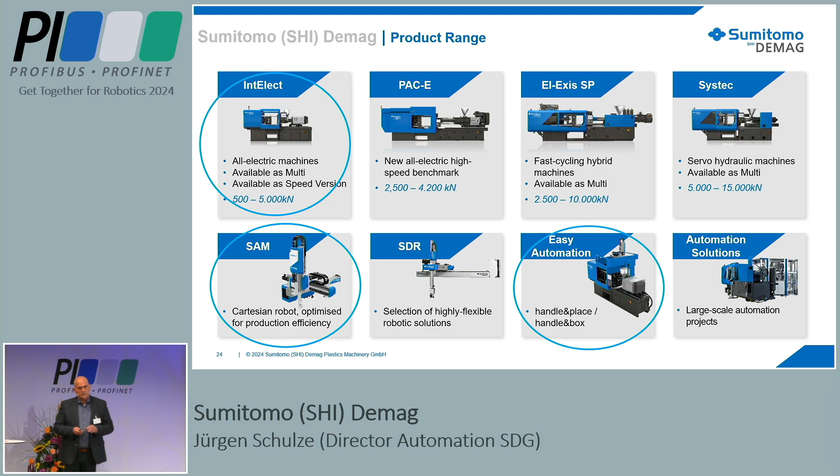And for automation, we have developed in the last years our own series. We called it the SAM series, Sumitomo Automation Machine. And we have additional elements for this automation, for example, a brand-labeled product from a French supplier. But our focus is mainly the handling system, very close to our process machine. And we are focused on more smart and easy automation.

And we think we have, from our strategy side, more than 30 years of experience with robotics and automation. We are focused, with our SAM strategy, on simple and user-friendly automation elements. And for complex automation, we have a strong network of more than 500 experts.

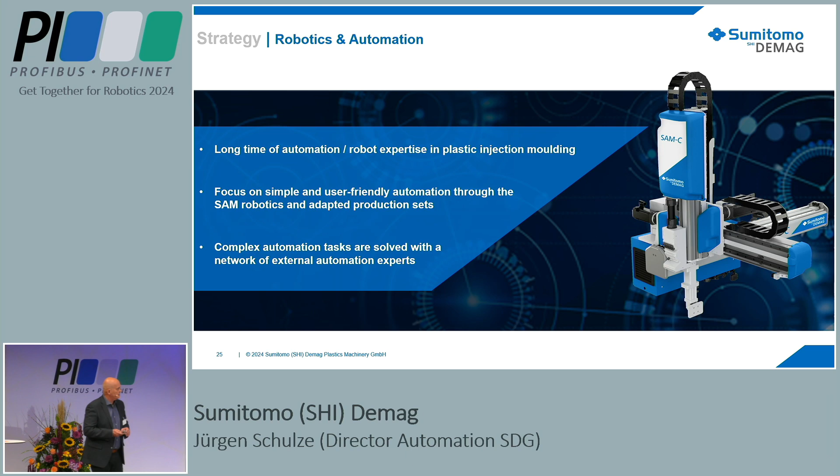Before I report what we have done in the last years, I will show you a typical molding process together with an injection molding machine, but with the newest development from our side for robotics. We say we have process-adapted robotics, because standard robotics is not the focus for us in the future, because we have changes with generation X, Z, and Alpha, which are coming.

And what you now see is a typical process. This starts with the demolding of the parts in the tool, the separation of scrap elements or cold runner elements. Then a quality check of the parts, and then a separation in bins with special inserts. On the right side, you see a flow chart of the process. Please, this is not in discussion in this presentation. It should only show you a rough overview of how this process works. And I start now the movie.

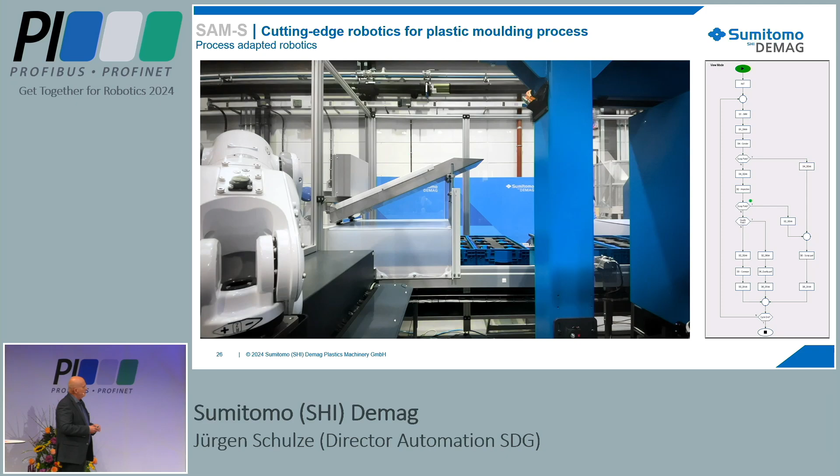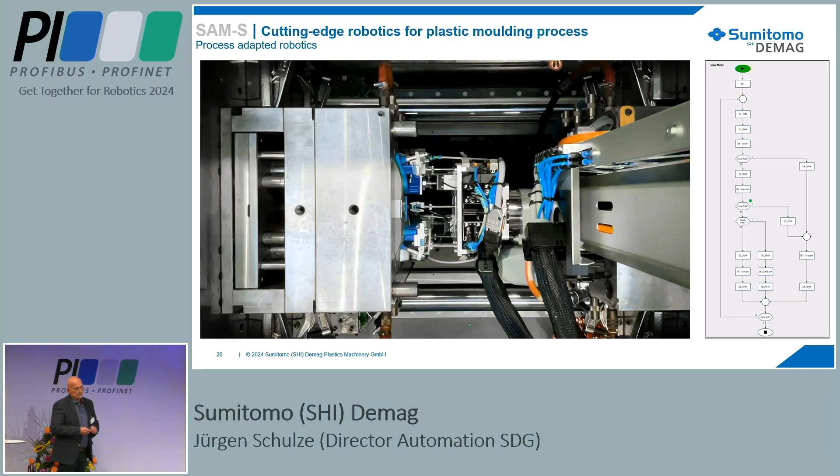We are very focused on robotics with linear axes because we have, in this case, the possibility to independently move these axes. You see now the separation of this cold runner. This is a real 6-axis robot with 6 degrees of freedom. This is the quality check, in this case with a video system. Then the separation of the 4 different parts into inserts. The process cycle time is approximately 28 seconds. The shortest production cycle for our machines with automation is approximately 4 seconds.

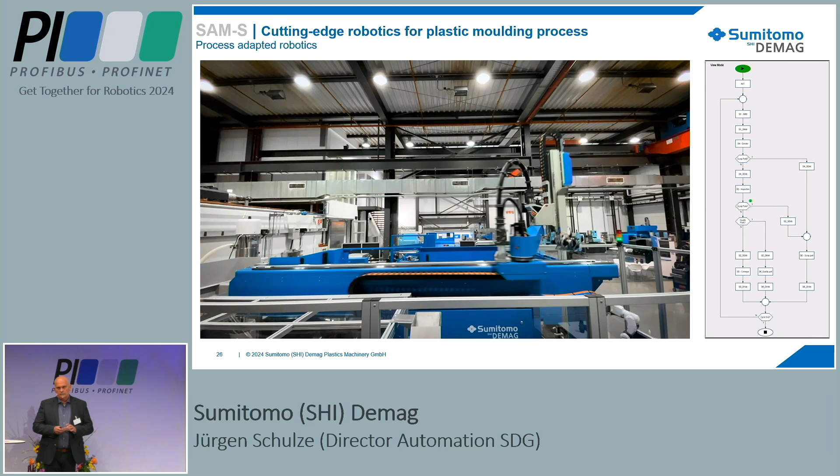And this is the first input for you, what we do and why we develop our own robotics for our machines. A standard application with a 6-axis robot and with a standard linear robot is possible, but for a lot of operators, not the best way.

When I joined Sumitomo Demag in 2017, I was a little bit afraid about the situation. We had a strong business with injection molding machines. We were well known as an excellent machine builder, but we had no acceptance in the market as a system supplier. So we analyzed the situation from the technology side, from standardization, and from demography.

The plastics industry has been really well standardized since the middle of the 1980s. It starts with the FHK interface for the machine, and in the meantime we had a lot of standardization for the machine, for the periphery and so on, and for robotics too. And we analyzed why we have had such a weak situation since the beginning of the 2000s. And it was not a surprise for us that the generational change has a big impact on our business.

We have worked with robots, linear robots, and later with 6-axis robots since 1995. For example, in 2000, you can remember the smart production in Strasbourg, the first 6-axis robots together with injection molding machines. For us, it was a little bit surprising that generation Z, with communication via smartphones and so on, has a big impact on our industry.

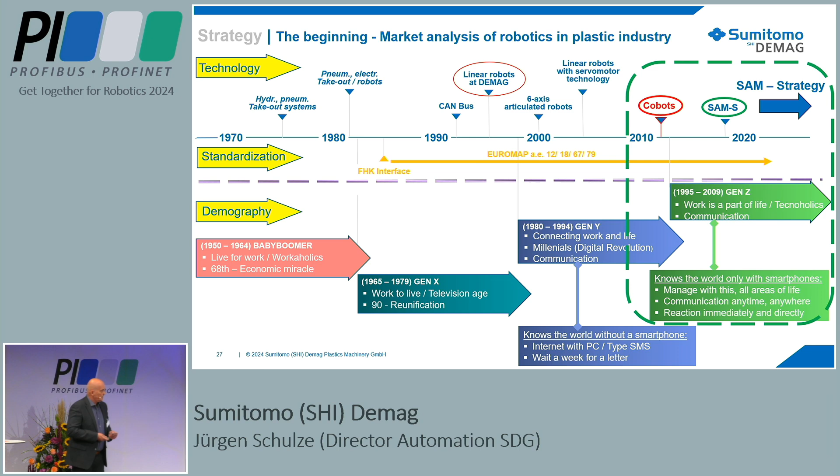And so we started in approximately 2018 with the development of our SAM strategy. And this was combined with special kinematics around the injection molding machine. And the idea was absolutely to combine the new kinematics with the kind of programming very similar to the cobots. And that is what I now want to present. What is the result of this?

The main needs for us in the injection molding industry or plastic industry was easy to use. This means easy programming, easy handling with the mechanics, easy understanding. So you have short training lessons for this. Unified design, this means very standardized, scalable design of the robots.

Universally applicable. We have a consumer market, we have a medical market, we have an automotive market, we have a market of electrical and electronic elements. The packaging market. Always a large discussion, footprint in the production, to have the most compact production cells possible. And with the shortage of skilled workers, always the discussion for higher autonomy of the production cells.

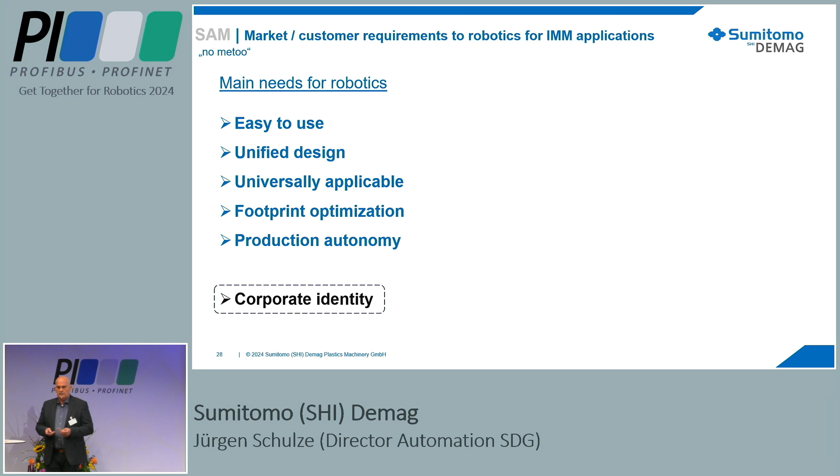For us, additionally, we want to have a better corporate identity of the products of robotics automation together with our machine. So we decided to develop our system after the market analysis. And on one side, we have our idea of a special kinematic of the 6-axis robot. On the other side, we have a lot of applications with standard linear robots.

The advantage of the linear robot on the injection molding machine is the workspace of the injection molding machine is more a cube. The workspace or the envelope of a Cartesian is very similar. In this case, it's very simple handling for the operators, and the operators are not experts like you. It's sometimes not so qualified persons, and it's more and more difficult to have such persons in the production.

Our idea was not to develop the mechanics. For this, we selected an expert partner. From the electronic side, we use the same elements as for our injection molding machine. The reason was to shorten the time to market. We are focused absolutely on the function design, to develop the robotics software, what we have understood from the market.

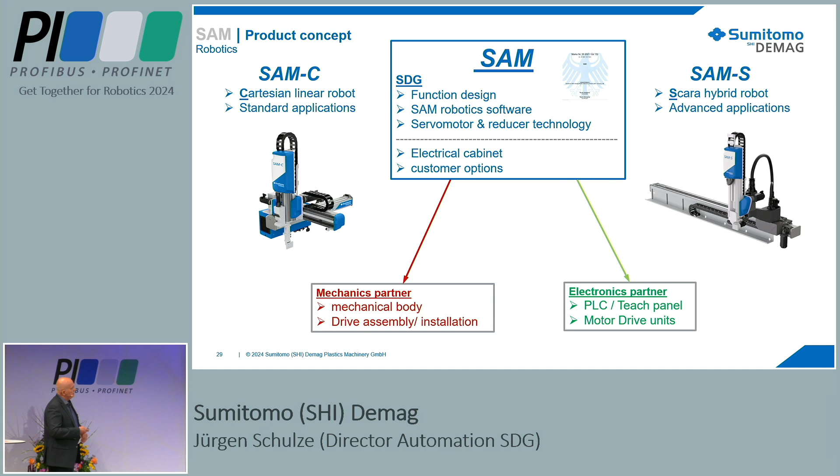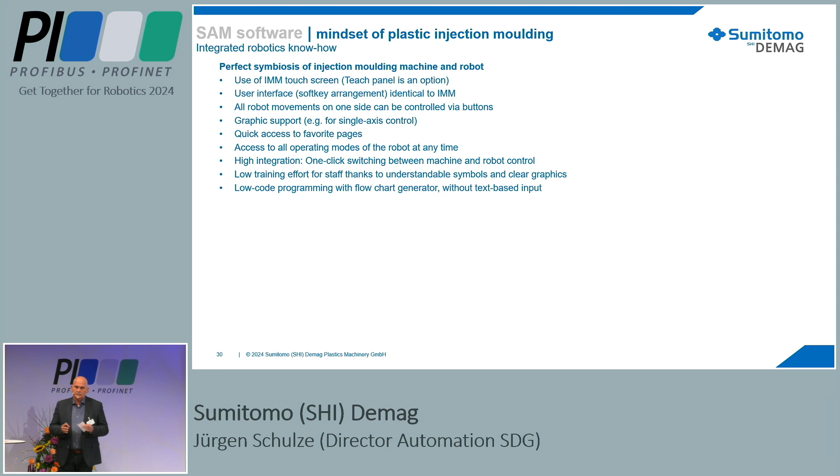We use from our company, Sumitomo Heavy Industries, the motors and the reducers, and we combine the mechanical body together with the cabinet and with the software in our factory in Wiehl, and added additional customer options. This is the story of the SAM on this point, and what I think after 5 years experience is the real value, the real pearl of this development, is the development of the software.

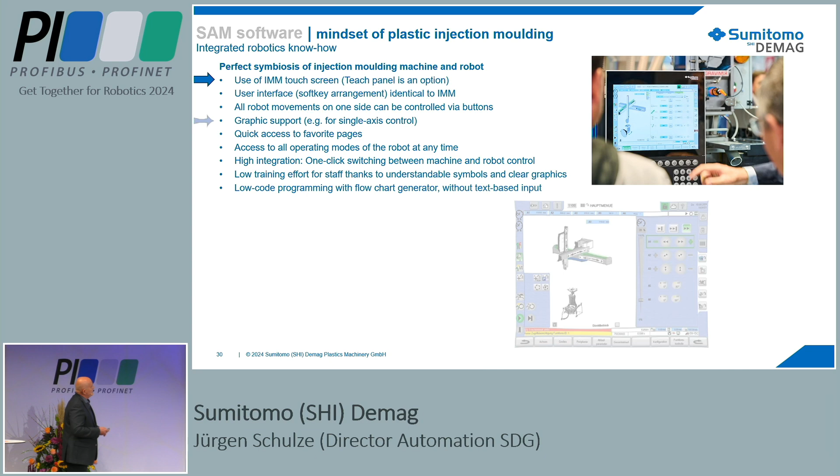Because we use the same touchscreen for the robotics programming as for our process machine. We use a lot of graphic elements for simple understanding for the operators. And we have realized a real low-code programming, and this starts with a flowchart generator. We have installed 3 basic recipes. The operator can use this, can copy this, can change this, store it with a new tool number.

And our experience from the pre-series we have installed by our customers and in our subsidiaries is, it's very simple to program the robot because it's helpful step by step. It's a good understanding, and we have the experience that in our training center, after 2 or 3 hours, it's possible to combine the robot program together with our process machine to a real production cycle.

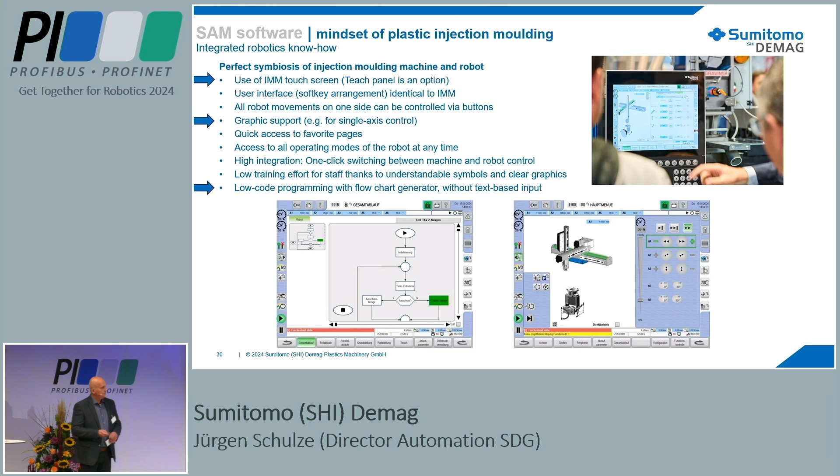This is now what I want to show now. This is the flowchart of the process of this movie. And it looks very complex, but in the starting, you edit elements very similar. Okay, it doesn't like me.

And you see on the right side, inside of these elements, we have blocks. And these blocks are to parameterize, or positions are to teach. And this is the total running program. You have no text that you have to insert, you have no programming lines. You have no special program language. You have here a real low-code programming.

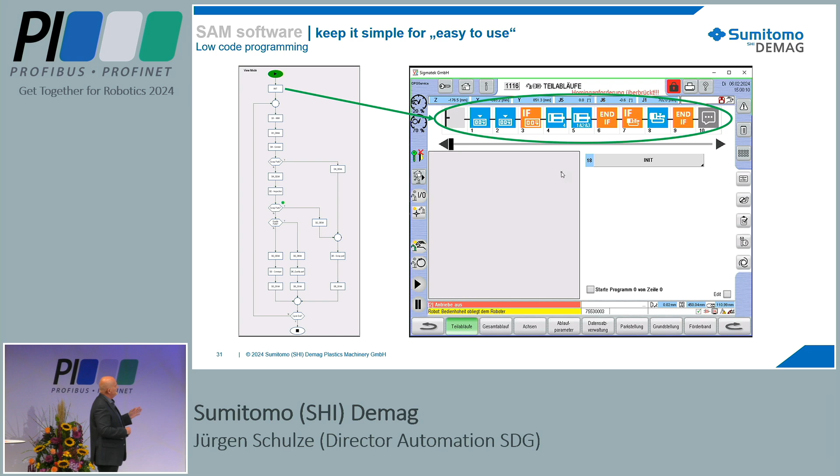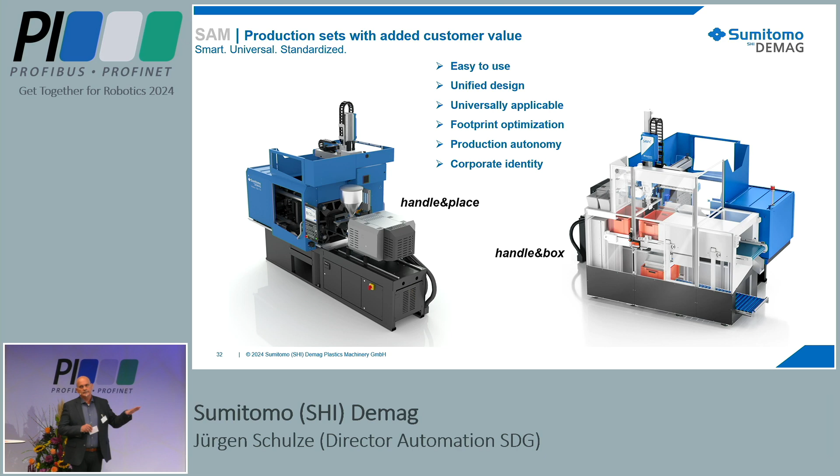And we have realized easy to use, from the programming, from the handling. We have this standardized design. We have 4 payload classes for the Cartesian robot. We can universally apply this solution in different industries. The footprint is the best we ever had. It's very integrated in the machine. You see these elements, the electrical cabinet in this position as an example. It's the safety, and this standard solution always with CE conformity.

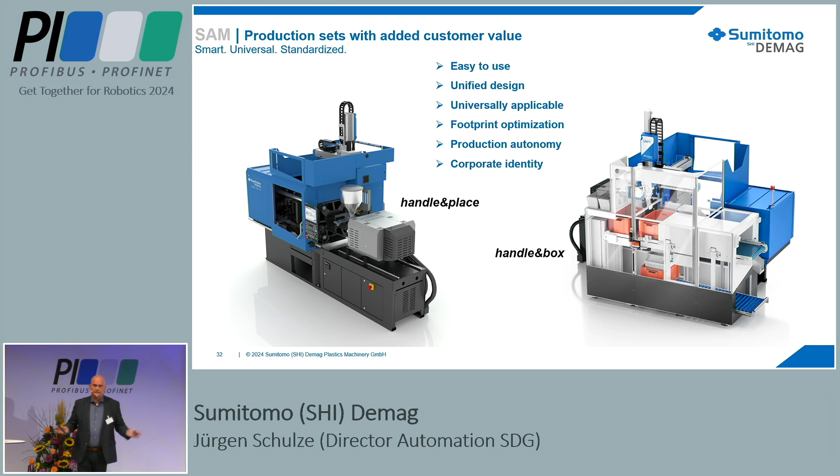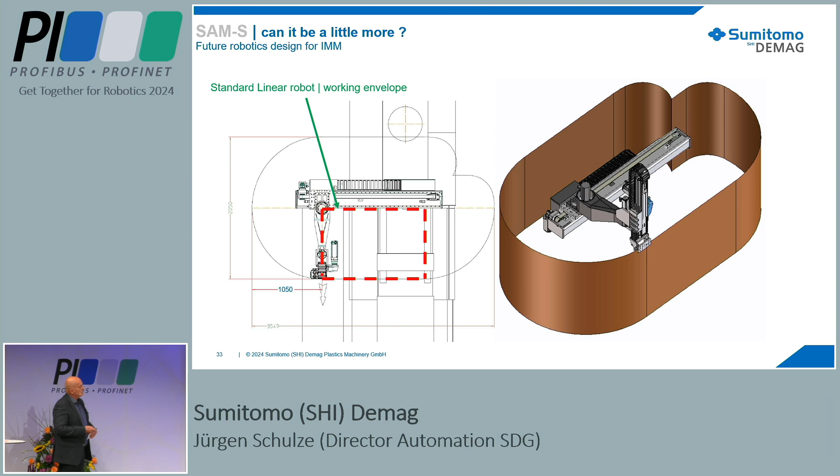And related to the SAM-S, you have totally other possibilities. You have a more oval space for the operator, or better, for the machine. And this gives higher possibilities for applications on the injection molding machine. You can add more periphery for different products.

You are more flexible. And we have checked this at the K-Show 2022 and now this year at the NPE show in America with a concept study to collect feedback from the market, from possible customers. And the feedback was very positive. And this concept is in work.

And we have here the advantage that we have 2 independent linear axes. If you have a problem in the tool, you lose a part, for example, the robot stops and is no longer in the automatic cycle. For 6-axis robots, we always have the discussion that we must have a home run program in this situation. For this one, since we have no collision points, the simple operator can use the control to move the vertical axis outside of the tool.

And if you understand the tool complexity in injection molding machines, tools cost more than 200,000 euro, or a gripper costs more than 50,000 euro. You understand if something happens, an operator in the night shift will never make a change on this machine. So it's very helpful to have here a solution between the linear robot and the 6-axis robot, related to the operators and the qualification of the operators in the future.

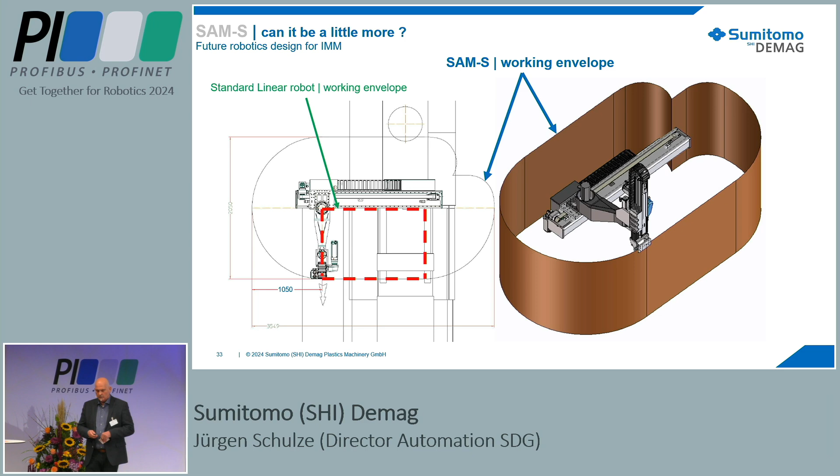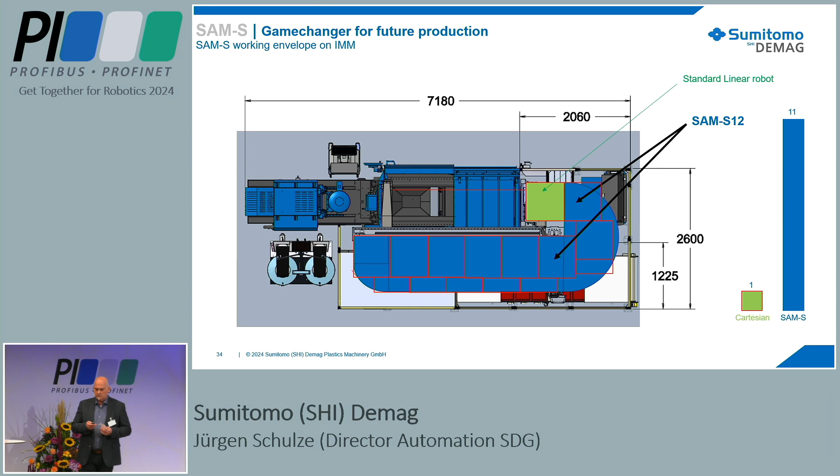Yes, for the future, and this is one reason why I'm here. We see future potential together with universal or standardized interfaces such as SRCI to transfer our process know-how to other processes, together with our mechanics, in other industries.